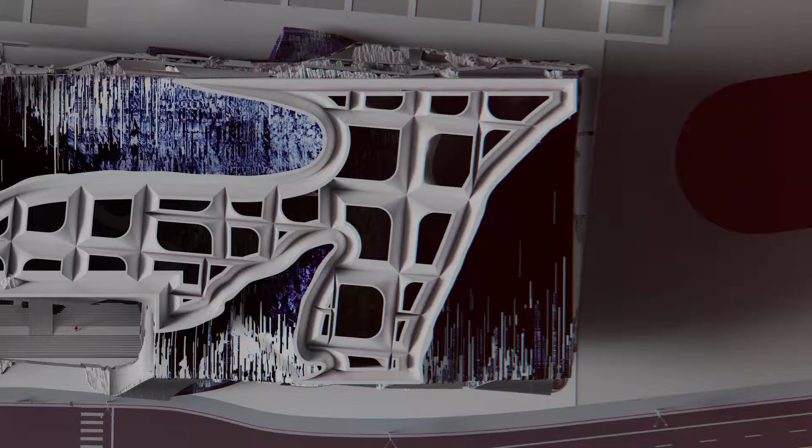The new home for LACMA's permanent collection uses the ideas of accumulation and entanglement as the starting point for building upon typological frameworks, exposing landscape and infrastructure's latent architectural potentials.

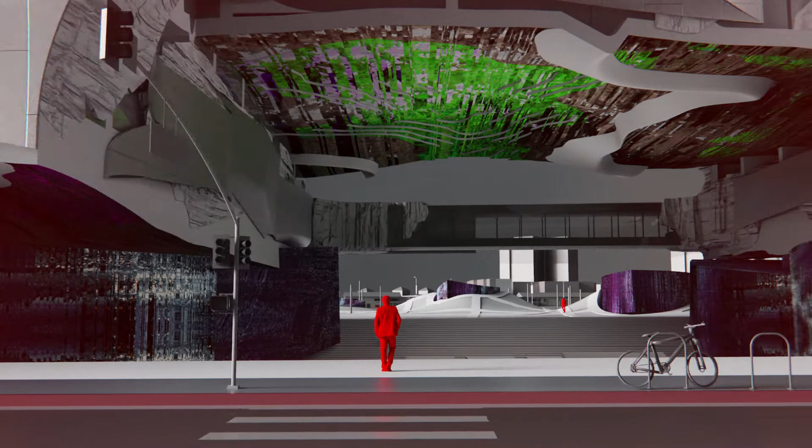The museum attempts to demonstrate architecture's ability to enact concepts outside of pure disciplinary and material limits by understanding the encyclopedic museum as a composite of many different elements, both natural and unnatural, and as a signifier of the Anthropocene.

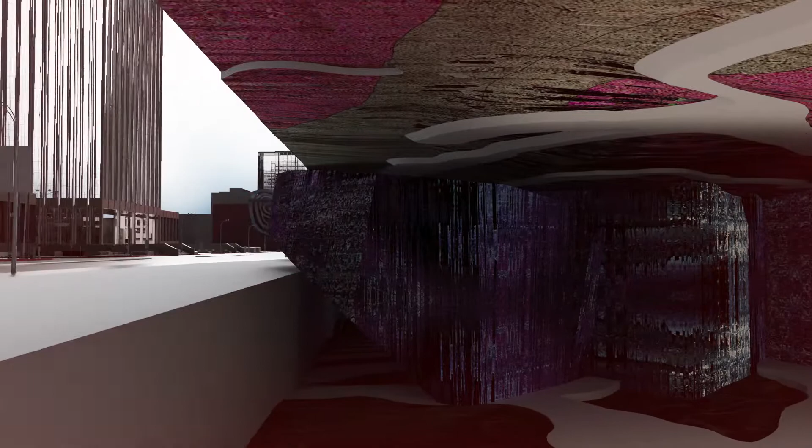Like plastic agglomerates, stones that have become geologically fused to molten synthetic materials, the project aims to embed similar relationships in its tectonic resolution.

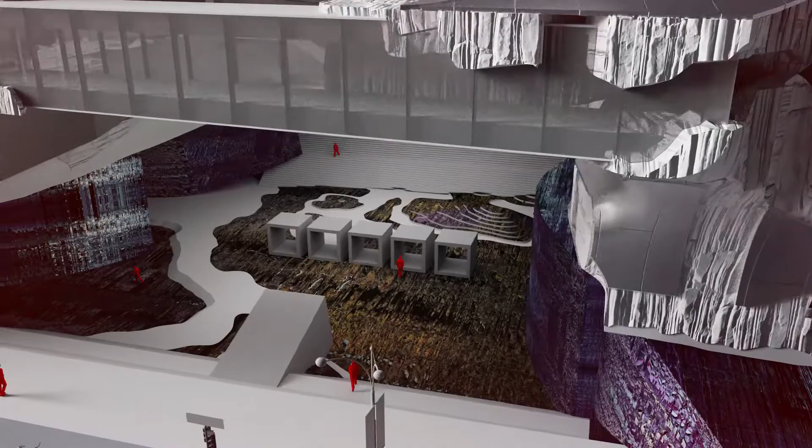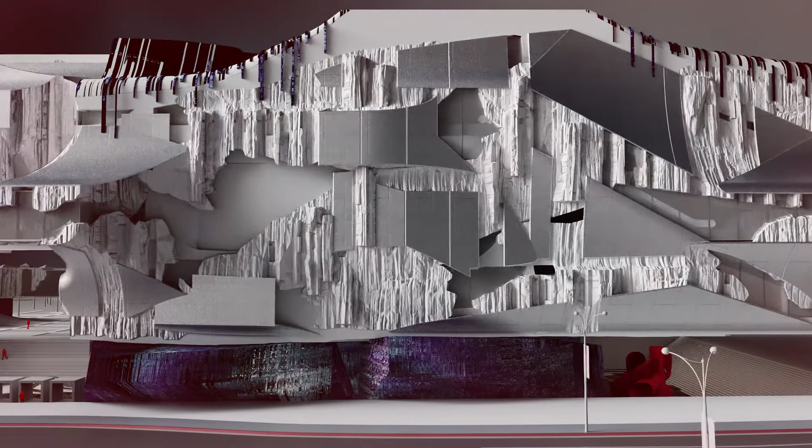The envelope, a hybrid progeny of the malformed and the pristine, presses upon the structure like a protective shield. The chink in the armor is revealed in key moments, where the tension in the internal juxtaposition of the terrain and structure, along with circulation passageways that wrap around the building, tears through the facade.

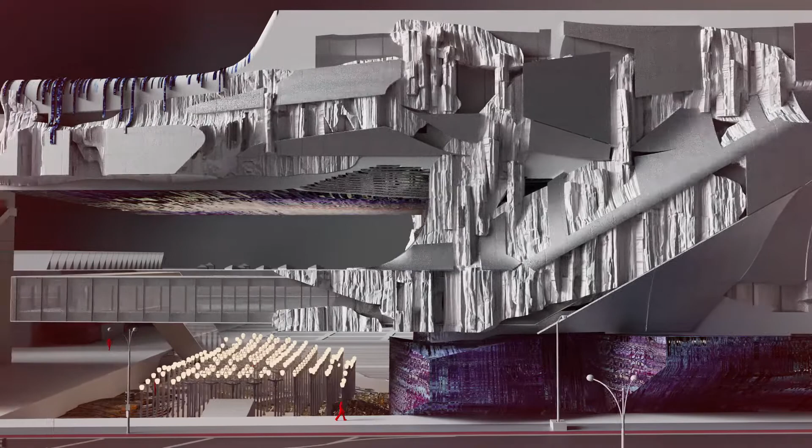A variety of civic spaces are produced in the landscape that encourage movement above and below ground while reorienting art and sculpture objects in a new perspective for public audiences.

Chris Burden's Urban Light is kept in its original XY position, but sunken onto a new synthetic groundscape framed by glass circulation passageways connecting the street and public plaza to the upper levels.

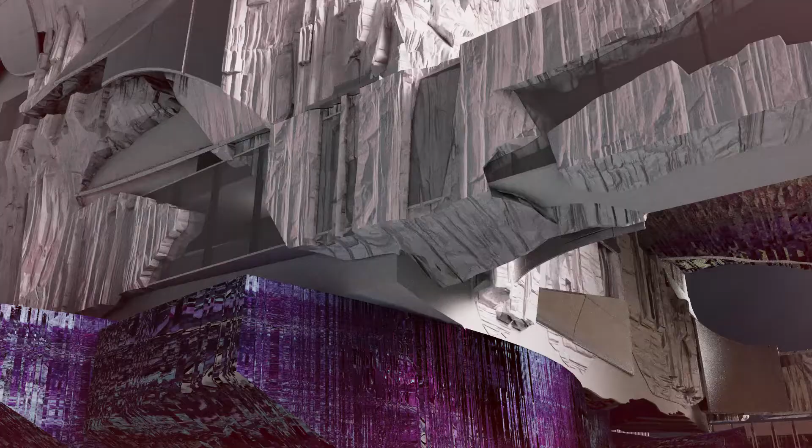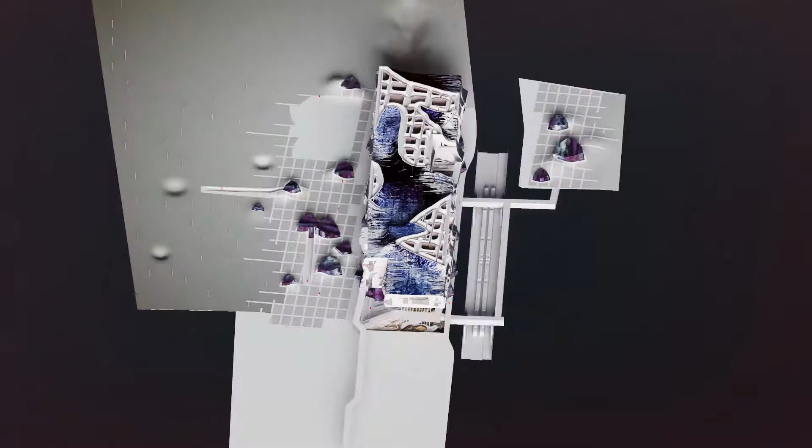Contextually respecting the surrounding site, the structure is sized and placed linearly along Wilshire Boulevard, and proportioned with respect to the neighboring Broad Contemporary Art Museum, creating an urban frontage and welcoming grand entry sequence for visitors arriving from the new metro station underground.

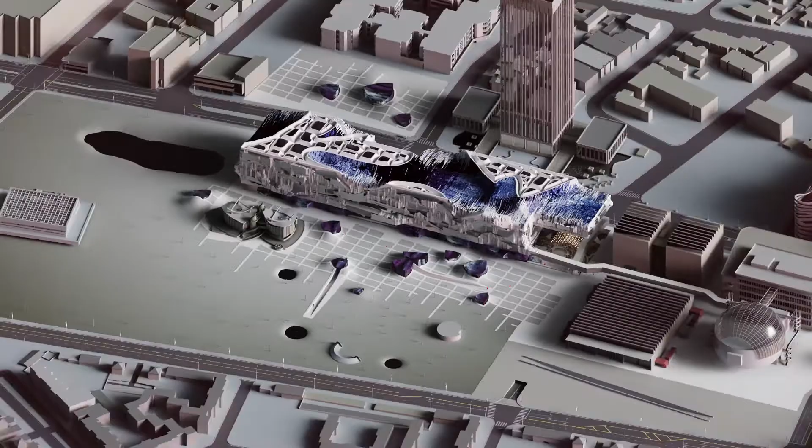The project speculates the intersections of building structure with Earth's topography and how they complement and contaminate each other. Modification of landscape surface and mass, similar to the extraction techniques of mining operations, is used to generate formal and spatial possibilities.

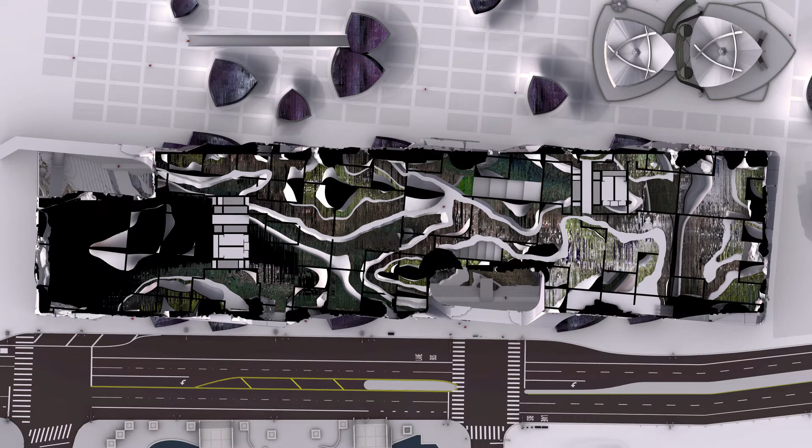The structural partition fields, a mixture of enfilade, open and mixed forms, pierce through the terrains in between, changing in a 1-to-4 ratio moving from top to bottom, facilitating different capacities of exhibition spaces for varying scales of art that require different levels of intimacy.

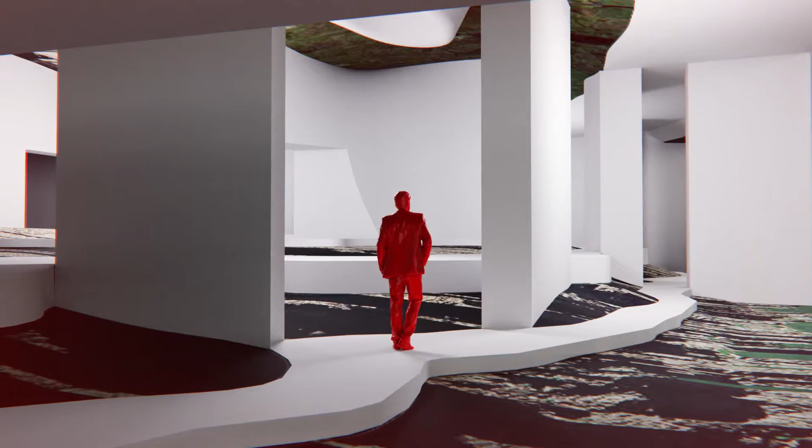The stepped contours create intimate areas of display and carved pathways leave corridors for trails.

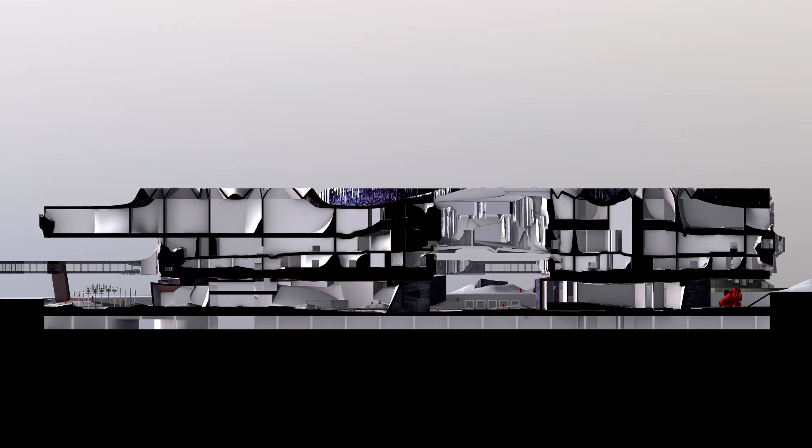Foreign terrains developed from map imagery are further enunciated by defining contours through the metaphoric application of open-pit mining and strip mining methodologies to produce interior synthetic environments for circulation and display in which art can live.

The partitions react to the contours and ravines of the terrains through the bulging action of walls that align with the movement of the contour line, enabling defined poche in between where art can exist.